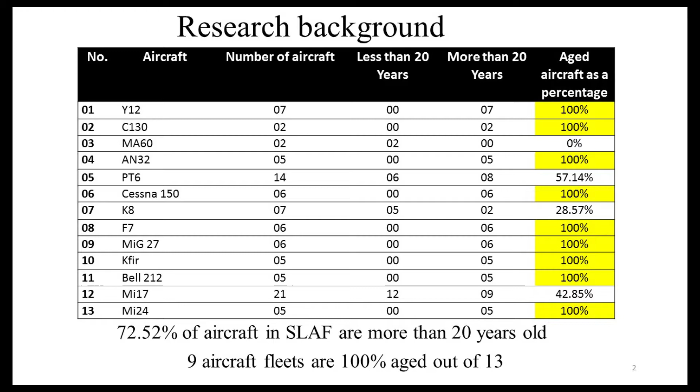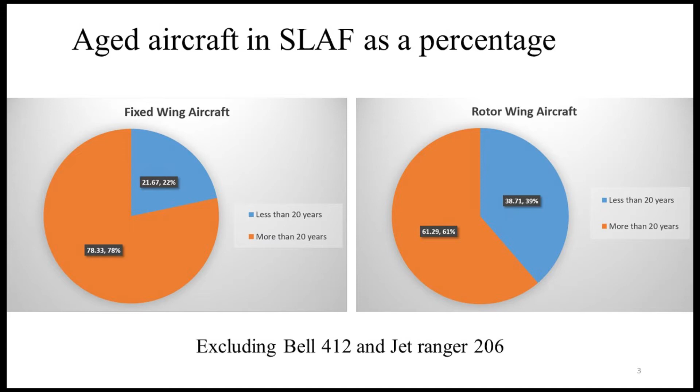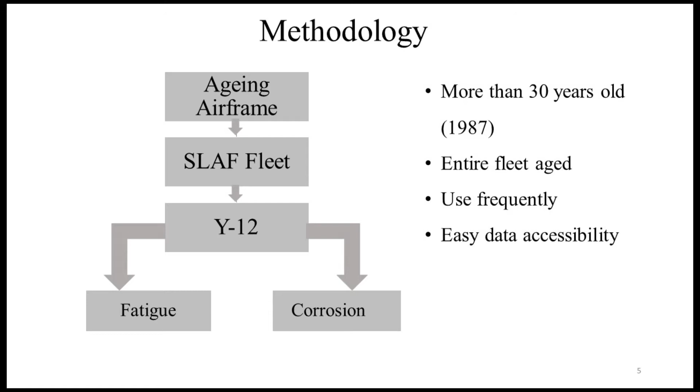In this research, we selected Y-12 aircraft as our case study because the Y-12 fleet is 100% aged. As it seems, corrosion is a major problem found on aged aircraft. In Y-12 aircraft, it was found out that, as a percentage, 74% is corrosion and 19% is fatigue.

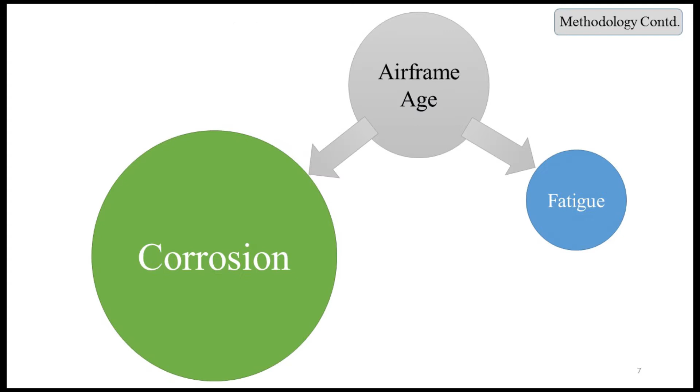These are the factors affecting corrosion on the airframe. Corrosion-prone areas have been identified through literature review as well as under the case study. After the use of a risk analysis matrix, we selected these key areas as high corrosion-prone areas in Y-12 aircraft, as shown in the next slide.

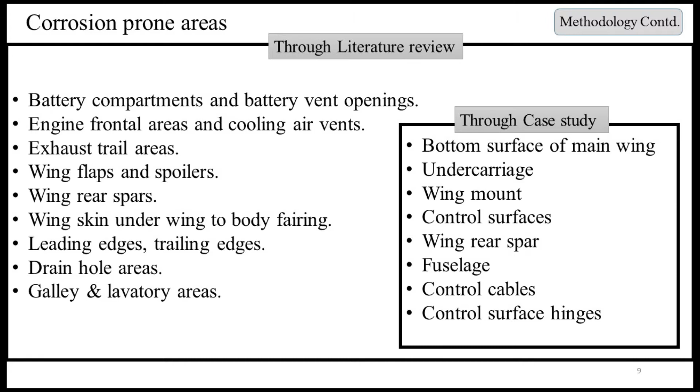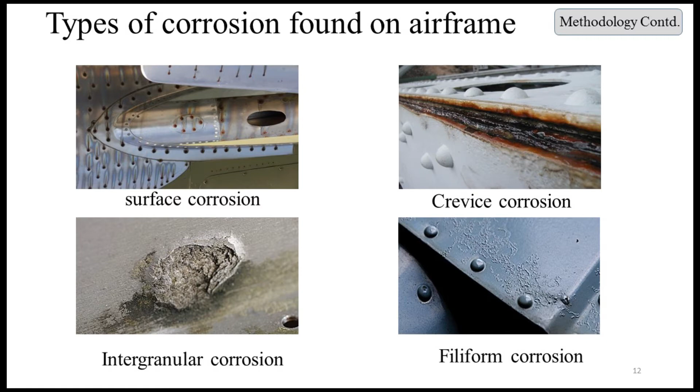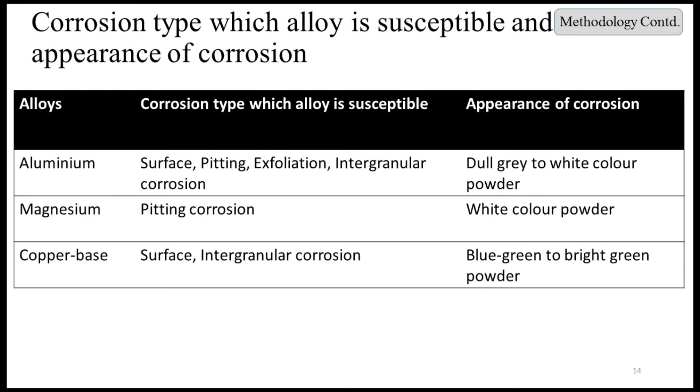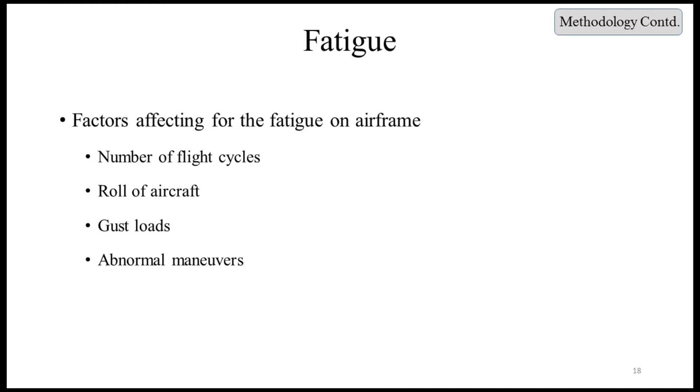These are the factors affecting fatigue on the airframe. Through literature review and case study, these are the identified fatigue-prone areas on an airframe.

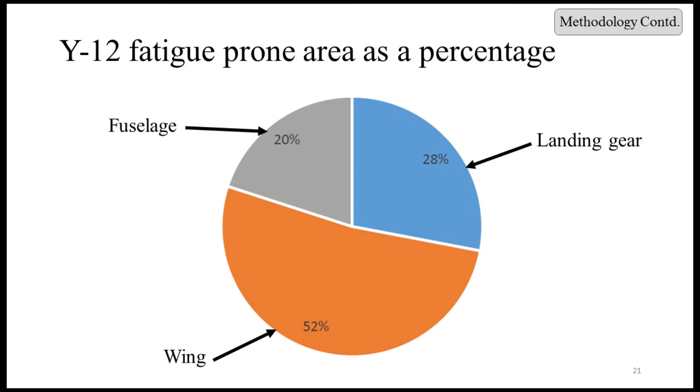Using risk matrix analyzed collected data, the main fatigue concentration areas came up as 52% on the wing, 28% on the landing gear, and 20% on the fuselage. Fatigue crack and stress corrosion crack are the main two types of cracks formed on an airframe.

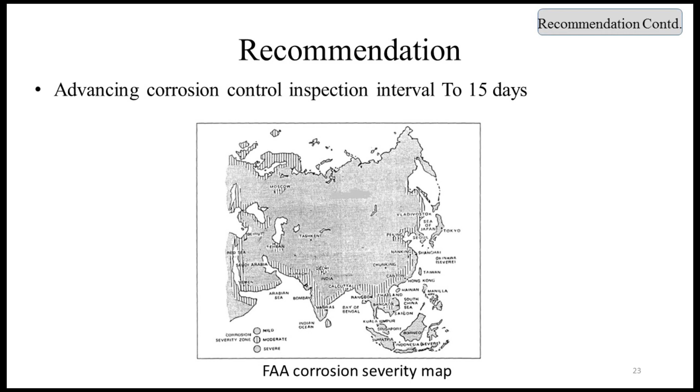Since Sri Lanka is an island and most Air Force bases are located in coastal areas like Ratmalana, Katunayake, and China Bay, even though the generally corrosion control inspection interval is 30 days, it needs to be advanced to 15 days to address that problem, according to the FAA corrosion severity map.